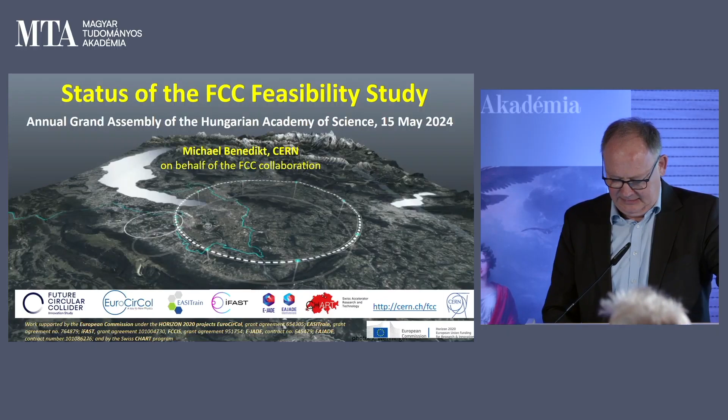In the first part, I would like to show you the scope of this future project, a little bit of the background when this study was launched, why it was launched, and the results at the intermediate review that we achieved. Then I would like to give you a feeling of where we stand with the preparation of the implementation of the project in the region, to show you that we are far beyond the point where this is just a paper study - it's now really becoming manifested in the region. In the third part, I would like to talk about technological developments on the accelerator side, on the technical infrastructure side, and the integration of all this with the local infrastructure. And in the end I will say a few words about collaboration and how the study is organized.

We call the program an integrated program because it consists of two different colliders that form part of it. The concept behind it is to prepare and build a science infrastructure for the 21st century that will remain at the absolute top level, providing the best conditions for accelerator-driven high-energy physics until about the year 2100. There are two machines: stage one would be a lepton collider, which we call FCC-EE, and this machine would operate at and produce the heaviest particles of the standard model - it will produce Z, W, Higgs, and top quark pairs.

So in that sense, it's not just a Higgs factory, as was recommended by the last strategies, but also an electroweak factory with the Z and the W, and a top factory. The design goal for this machine was clearly to produce the highest possible luminosities at all these working points, to provide maximum statistics under the cleanest possible conditions.

Stage two in the longer term would then be a hadron collider, functionally and conceptually similar to the Large Hadron Collider operating at CERN now, but nearly an order of magnitude higher in center of mass collision energy, and also an order of magnitude higher in luminosities. This would be a continuation of physics at the energy frontier, not just proton-proton, but like the LHC, also ion-ion or proton-ion collisions. The physics program, which I'm not covering here, is synergetic and complementary on the two machines.

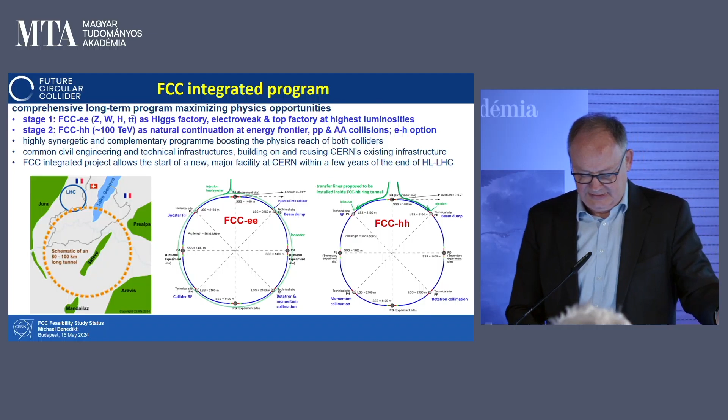At this moment, we are in what we call a feasibility study, launched in 2021, that will run until March 2025. This study should give sufficient input for an update of the European strategy for particle physics, which will be launched in summer 2025 and run until summer 2026.

In case of a positive recommendation from this European strategy update process, the CERN Council, with other financing partners, could then approve the project typically one year later, around 2027, beginning of 2028. This in turn would allow civil construction to start at the beginning of the 2030s, around 2032.

Civil construction would take about 8 years to be fully completed, followed by technical infrastructure installation, accelerator installation, and of course detector installation, so that operation could start in the middle of the 2040s, by 2045. Also indicated here is 2041 as the presently foreseen stop of high luminosity LHC.

Once the Lepton Collider goes into operation, completion of the physics program as presently envisaged takes about 15 years, so that by 2060 the Lepton Collider physics program would be accomplished. Then a typically 10-year turnover period from the Lepton Collider to the Hadron Collider, as was the case from LEP to LHC, would enable the start of the stage 2 Hadron Collider from 2070 onwards.

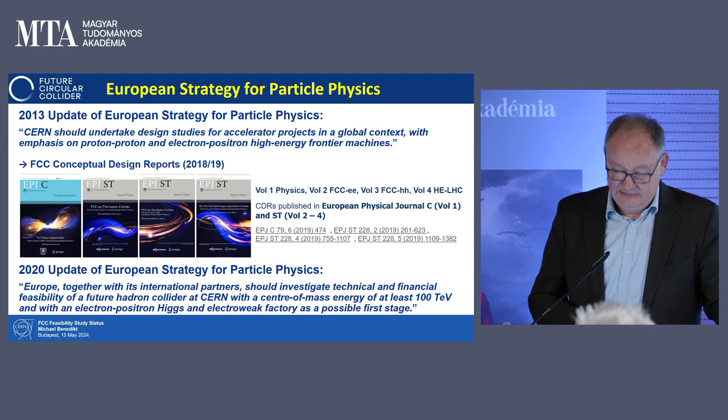Consequently, CERN launched a design study to prove the feasibility of the future circular colliders. This study was started in 2021, and here are the main goals, which can be grouped into three topics.

First, we should demonstrate that the infrastructure can be built, so feasibility of the tunnel, technically and administratively. This means considering where you put this infrastructure, where you want your access points from the surface to the tunnel. This needs interaction with the local region, with France and Switzerland, which are both host states of CERN, and also at the smaller level with the individual villages and communities concerned by the project.

The second big group is our core competency: this is the design of the accelerators, the design of the experiments, detectors, and the R&D on all these technologies.

The third block in this feasibility study is to develop the financing concept, the financing model, and the organization and governance models for the project during the construction phase, but also for the operation phase. This feasibility study should be sufficiently detailed to allow discussion by the European strategy and afterwards by the CERN Council on the realization of the project, and to enable a decision on the project. We will deliver this report by March 25.

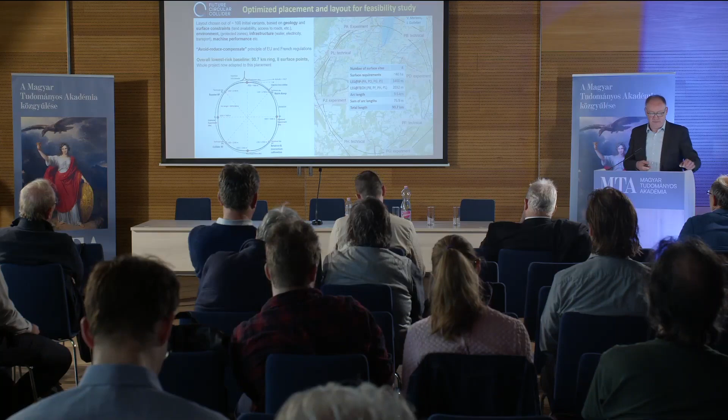This means everything visible on the surface needs to be acceptable, compatible with environmental aspects, with urbanistic aspects. It needs to be integrated with the existing highway, transport and road networks, with the existing railway networks because you need transport, with the existing electricity grid because you have to connect your 100-kilometer infrastructure at a few points, with the existing water distribution systems because you need cooling water for your facility, and so on. So this is one big block that you need to manage.

The other big block is the construction of the tunnel. There you have to look at the underground situation, the geological composition, and the risk depending on whether you put yourself in one region or another.

And the third big block is the scientific performance. If you build your machine too small, you will not have the energy reach of the Hadron Collider. If you build it too small with too small a radius of curvature, you will have too much synchrotron radiation, and you will not be able to produce high luminosity with the Lepton Collider. So these things you have to balance.

We studied about 100 different variants, differing in circumference, aspect ratio, number of surface sites, and so on. Finally, this converged to a 91, or 90.7 kilometer ring with four-fold symmetry, so each quarter is identical to the next of the 4 quarters. The arc segments are all identical, so there are 8 identical arc segments.

The arc segments are combined either by a long straight section, 2.1 kilometers, which houses technical elements for the accelerator, or following arc segments are combined by a 1.4 kilometer straight section that houses the experimental insertions. Experiments will be located at 0 degrees, 90 degrees, 180 degrees, and 270 degrees. In between you have the technical straight sections.

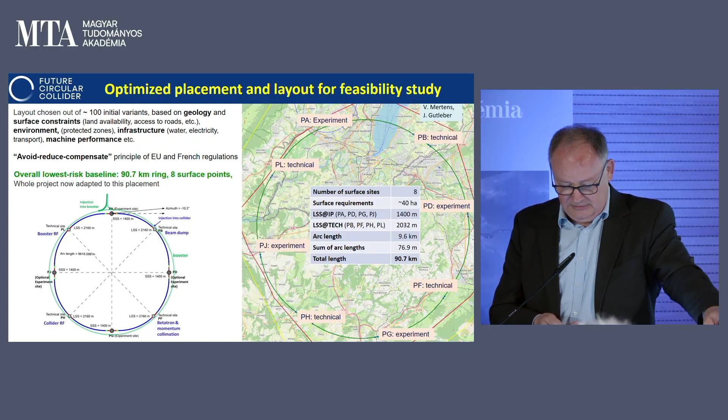Up to this point, we were working mainly on data that were already available from the host states: geological models from universities with geology departments in the region, from the geological institutes of France and Switzerland, and surface data from the host states, from the administrative organizations of the regions, of the canton of Geneva and so on. Based on this, you optimize your location.

Afterwards, you fix it. And then, of course, you have to go to the villages that are concerned, and you have to speak with the local population. You start this, of course, with interaction with the mayors of the villages concerned.

In total, there are 41 villages under whose territory the FCC tunnel would pass, and 10 or 11 are particularly concerned because there you will find surface sites. Since about a year, we have launched this contact, and we are discussing with these people, and we have now reached consensus with all these surface site locations, except for one where the optimization process is still ongoing.

But for the other 7, these are those marked in light green on this plot. With all the others, we have identified the individual cadastral surface plots that we want to reserve for the surface sites. This reservation process is now being put in place by France and by Switzerland to guarantee the availability of these land plots for the project during the design phase and the decision period up until the start of the project. This is key and essential, because it's absolutely not easy to find locations where you can implement such a large infrastructure.

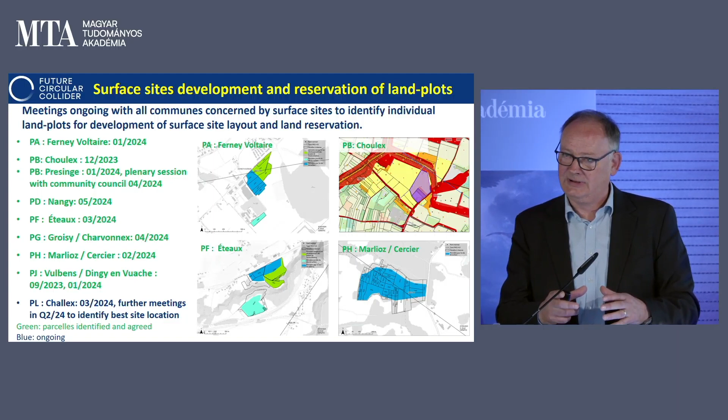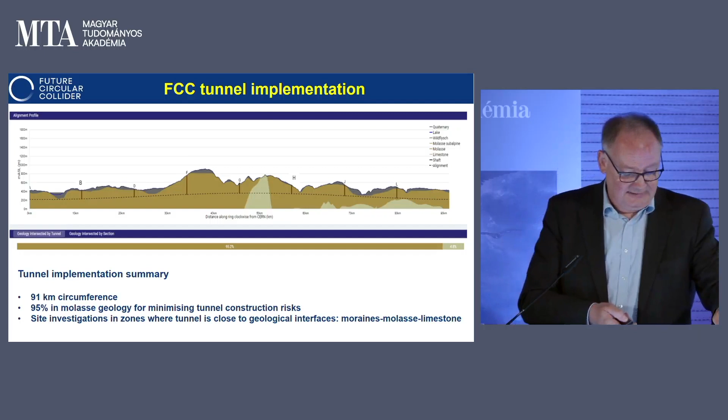Now I move to the underground site. Here on this plot you see a cut of the tunnel with the 3D geological model, and there are a few interesting aspects here. We want to stay in this medium brown area that you see nearly all over the place.

This is molasse rock. Molasse rock is a soft rock, a sandstone type rock that has no karstic structures, so there are no unexpected holes or whatever that are delicate if you do the tunneling with a tunnel boring machine. And there is normally also no water inlays with high pressure on the water. This means this is an ideal medium for tunneling fast, with low risk, with tunnel boring machines.

Now, when you look in more detail, you see that the tunnel trace comes very close to other structures. Here is the crossing of Lake Geneva. You see in blue the lake bed. Underneath the lake, there's moraine structure, and the moraine structure goes close to where the tunnel will be. Here again, there's moraine structures close to the tunnel. This is a location where the Arve River is crossing, and here on this side is the crossing of the Rhone River.

And here on the lower side, you see the light gray area. This is the limestone structures of the Jura Mountain. Limestone structure of Jura Mountain caused problems during the LEP tunnel construction because of karst and because of water under high pressure. So we would like to avoid this.

Now, to understand exactly these interfaces between the geologically favored zone and the less favored zone, we are now doing high-risk area site investigations, as we call this process. We will do about 28 to 30 drillings from the surface down to the tunnel level, exactly at the critical locations. You see here, for example, this is Lake Geneva, this is the Jura Mountain on this side, and here you have the Arve crossing with a couple of drillings, and so on and so forth.

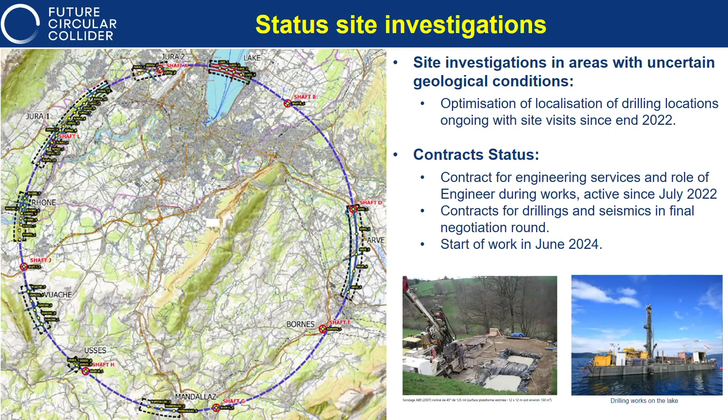We have been preparing this work for more than a year, and it will now start. All the contracts have been signed, and it will begin in June 2024. This is a project that will be visible across the whole region, so it needs exchange with the local population and acceptance already at this stage.

Moving to the underground design, we have now developed 3D models of all the underground structures at a level of detail that allows us to decide the construction technique and quantify material needs. So we can do a bill of quantities for everything needed to construct a tunnel, which allows a relatively precise cost estimate, calibrated by experience from tunnels recently constructed in France and Switzerland, such as the Alpine traversal tunnels, Gotthard, Brenner, and so on.

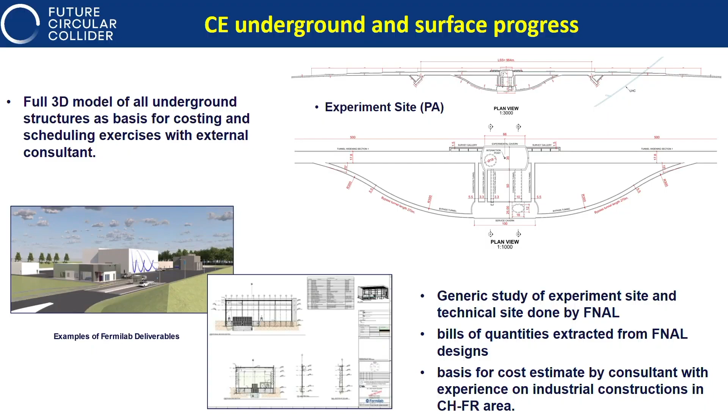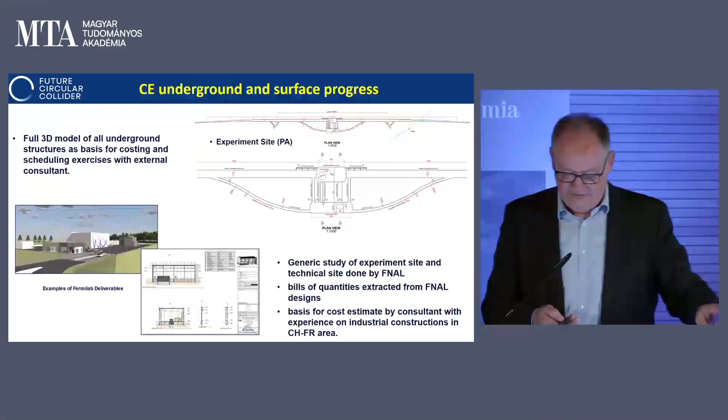Similarly for the surface buildings, we have one generic design for an experimental site, covering all the buildings foreseen there, and one generic design for a technical surface site, covering all technical buildings. Again, we have bills of quantities that we gave to a local construction company specialized in industrial buildings in the region, and they made a cost estimate based on their most recent projects. So we have good confidence in these cost estimates.

Speaking now about environmental aspects: when we excavate the tunnel, the excavated volume is 6 million cubic meters. When the material comes out, it expands, since it's no longer compact rock, corresponding to some 8.3 million cubic meters of excavation material.

This material doesn't come out in one place. It comes out where you position the tunnel boring machine, since the machine drills and the material emerges where it starts. So you have to deal with about 1 million cubic meters at each launch point of a tunnel boring machine. A big topic here is reusing this material.

The problem is that molasse is not a stable rock, so you can't use it like granite pieces, because it dissociates in some sense—it's not stable. But you can use it like a soil. The only issue is that it's sterile when it comes out of the ground.

So now we have a project—this is, in fact, the first FCC-related experiment. It's taking place on LHC Point 5, on a field in front of the CMS site. You can see the layout here, with about 18 test fields set up. We are using molasse material that came out of the High Luminosity LHC civil engineering construction over the last two years, and with several university and industrial partners, we are working on processes to transform sterile molasse into fertile soil that can later be used for land filling and covering with a fertile layer of soil.

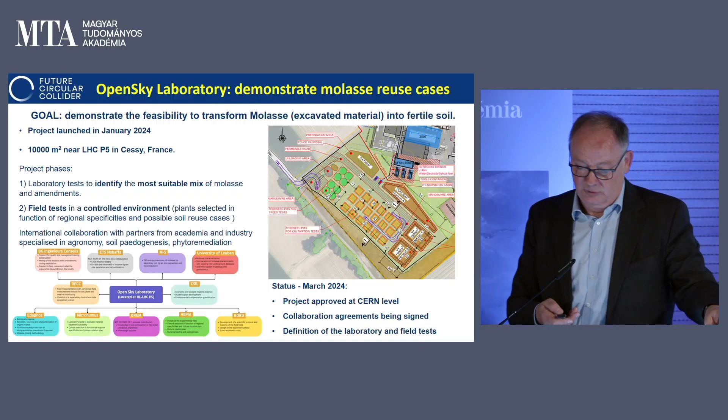A side effect of this is that, if the project is successful and demonstrates how to reuse molasse, it will need approval by the host states. If we get this approval, the technology can be applied to any tunnel project in Europe or elsewhere where molasse is the main material, and such tunnel projects are frequent. So there's a socioeconomic component of large-scale integration here as well.

Moving from the tunnel to the technical infrastructure, let's look at transport and electricity. For a project this huge, transport is a major issue, not just for operation but especially for construction. We've taken this into account and positioned the project so that at three main points with major excavation—points D, G, and J—we have a very close highway connection, within a kilometer of an existing highway access station. So you just need to bridge the distance from your surface site to the existing highway access zone, which is very efficient and helps with the acceptability of the project.

In total, to access all 8 surface sites adequately for any kind of transport and work, we will only need to build about 4 kilometers of road at the departmental road level.

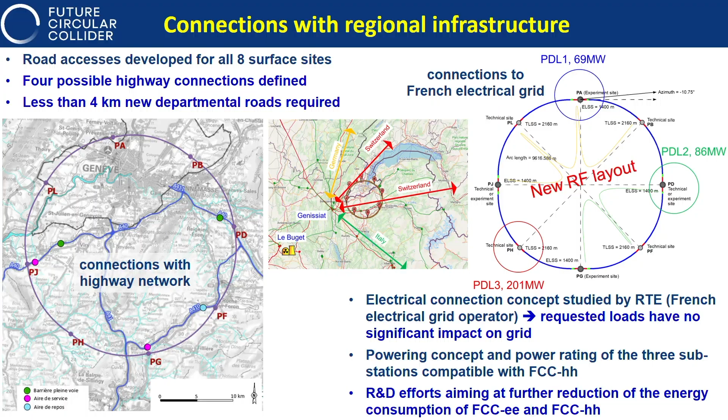And of course, this supply concept is already covering any needs for the stage 2 accelerator, the Hadron Collider. Now I move towards the machine side and the integration of the new infrastructure with the CERN infrastructure. If you look here on the right side, this is the overall picture: you see the LHC, this circle here, and the FCC, the lower circle below, and the SPS, with the red square zoomed in on that side.

So on the top here, you have the LINAC. This is the particle production complex, for electrons and positrons. It will be located on the surface on the CERN Prevessin site, roughly behind the SPS North Area, to the east side of the SPS North Area. From that point, the beam is accelerated to some 20 GeV by a high energy LINAC, and then it moves downwards to the SPS.

It touches the SPS tunnel close to point 4. This is done on purpose, to have the possibility to bring this beam into the SPS should there be any reason to do an experiment involving acceleration via the SPS tunnel. From that point, the beam moves further down to the level of the FCC and is then injected clockwise, via a U-turn, and the antiparticles anti-clockwise, into the FCC direction.

Now, this choice of being close to the SPS and having a transfer line with the same bending radius as the SPS machine also allows us, in principle, for stage 2, the Hadron Collider, to possibly use a superconducting machine in the SPS tunnel at much higher energy than the SPS today as injector for the future Hadron Collider, and to reuse the already built transfer line.

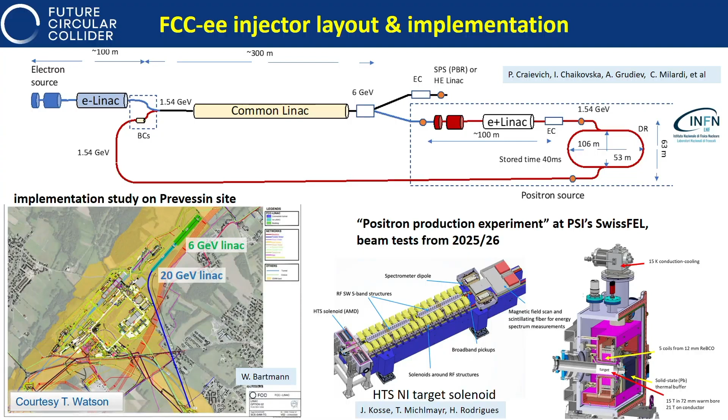Positron target and production is a topic that isn't addressed so frequently these days. We have a larger setup with partners located at the Paul Scherrer Institute in Switzerland, where we do a positron production experiment.

The SwissFEL free electron laser LINAC operating at the Paul Scherrer Institute provides 6 GeV electrons. With this LINAC we have a beamline, and we will put this positron target, shown here on the lower part, that is being produced at PSI. The capture structure is located in one of the experimental zones of SwissFEL.

We will have the opportunity to test and verify production efficiency at different energies, since we can vary the energy from the LINAC, so that by 25-26 we know definitively that the concept works and fulfills all specifications. The target design was done in a way that is directly scalable to the full power target for the FCC-EE.

Just to mention one thing decisive for the dimensioning of the machine and the key technologies: we allow the beams in the lepton collider to lose 50 megawatts in the form of synchrotron radiation at each of the 4 different energies. Since synchrotron radiation depends on the fourth power of the kinetic energy, we can have much more beam circulating in the machine at low energy, at the Z pole, than at high energy, and this transforms into much higher luminosities at the Z than at the ttbar.

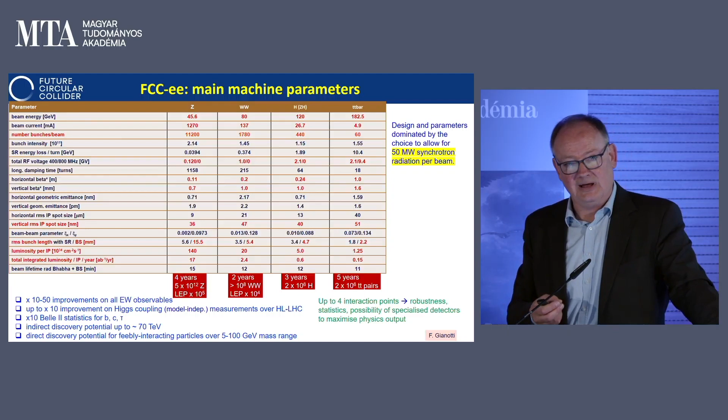It also transforms into completely different requirements for the radio frequency system at these working points, because the RF system has to put this 50 megawatts back onto the beam. This means the efficiency of the radio frequency system is a key technology and a key important object in this machine.

The important message here is that this is a machine that will not be static like the LHC. We put the LHC in place and it operates for years in roughly the same configuration - now we make a luminosity upgrade, but then it runs again in the same configuration. This machine will have quasi-permanent change, because whenever you go from one working point to the next, you modify the RF system substantially. You can bring in the latest technology, new power sources for the RF. So there is a long-term parallel RF R&D program in all aspects, alongside the lifetime and evolution of the machine.

And of course similar aspects will need to be taken into account on the detector side, since there is different physics that will be seen in the different phases.

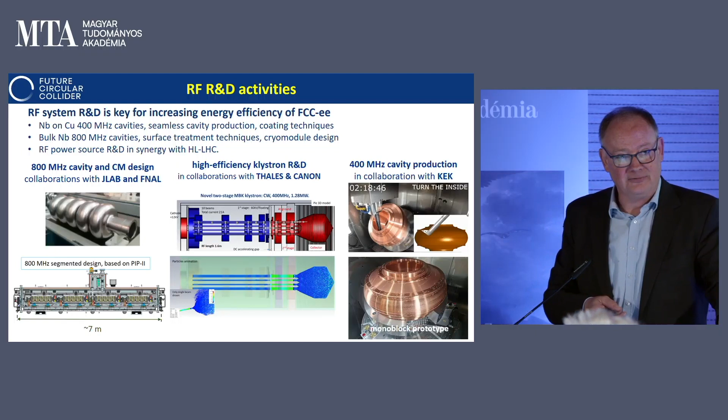Now a few slides on R&D activities, to give you an impression of what is being done and what we are looking at. Clearly radio frequency is an absolute key issue - 100 megawatts of synchrotron radiation needs to be compensated, and taking into account the efficiency of the RF system, this translates into 200 megawatts of electrical power. So whatever can be done to improve the efficiency of RF production or the cavity systems is extremely useful, and there are lots of efforts going into this domain.

I will not go into further detail here, but there are 2 different cavity types: one is copper cavities coated with niobium, or possibly other superconducting materials like A15 or niobium-3-tin, though this is still in the R&D phase. On the higher frequency side, 800 megahertz, there are bulk niobium cavities, with a lot of R&D on RF production. In the middle, you see new designs of klystrons to improve klystron efficiency by 20-30% compared to what is presently achieved.

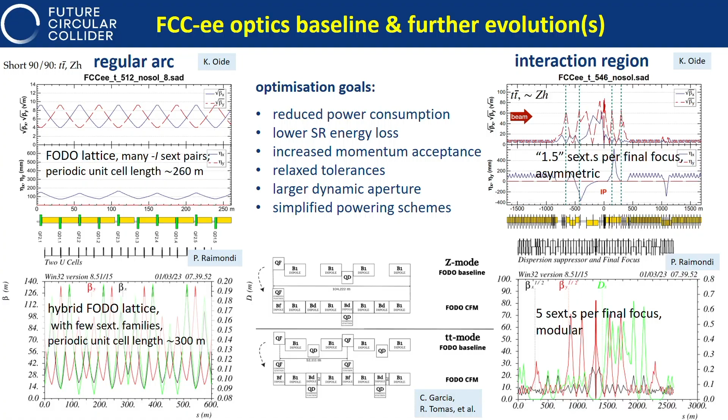There's also a lot of activity on the machine design, on the magnetic design and on the lattice design - how you configure your magnetic elements around the circumference to achieve the best possible final focus and maximize luminosities in certain conditions. Important here is to design something good for operation, tolerant against field errors and positioning errors. The alignment of a 90-kilometer accelerator is a non-trivial topic, and the more tolerant your lattice design is against these aspects, the more stable and efficient the operation phase will be. This is key and is permanently being improved.

Looking more into the engineering side, 80 kilometers of this machine consists of arc, and the arc is a repetitive structure. You design your arc cell - the smallest unit is a half cell from the accelerator physics point of view, and this half cell is repeated for 80 kilometers. The half cell has a length of 25 meters, so it's worthwhile to build at the earliest possible stage a model of this half cell. Whatever you develop, you put into this one-to-one scale model to understand transport, positioning, maintenance, accessibility, and integration aspects, keeping in mind you want to industrialize production as much as possible.

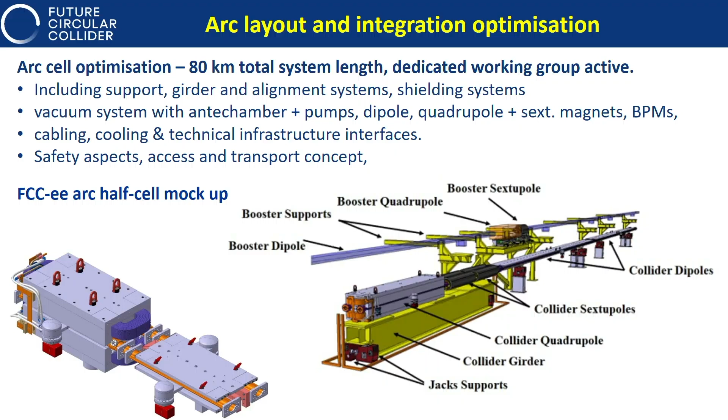So we are preparing in one CERN hall on the Meyrin side to build a tunnel segment of 25-meter length to have the full geometrical conditions, and then we will install in there a mock-up of 25 meters of the arc - a one-to-one model with all the cables, all the water piping, all these elements - to optimize this structure in terms of cost, operability, and maintainability.

Another topic coming back to sustainability is the question of powering the magnets, magnet design. We have a lepton collider in the tunnel with two vacuum systems. If you remember, the LEP machine had a single vacuum chamber, and the electrons and positrons were circulating in the same vacuum chamber. Having both particles in the same vacuum chamber meant you had to avoid that they see each other all the time, which meant avoiding filling the ring completely with bunches. This means lower efficiency in terms of luminosity, since you're not doing the maximum. That's why we have two separated vacuum chambers.

Two separated vacuum chambers means we can fill the machine completely, but of course you have to have two magnetic channels, one for each vacuum system. Here you see designs of magnets that can supply magnetic field for both vacuum systems while having only the powering needs of a single magnet. This means you gain a factor of 2 compared to a classical solution with two independent magnets, and this is done by these dual aperture systems. The magnet design is even strongly simplified.

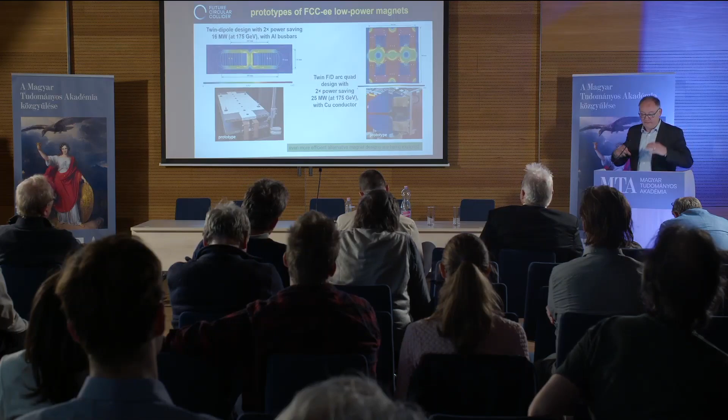If you look at the right side, these are two quadrupole magnets - one quadrupole aperture here, the other one here. You see the hyperbolic shapes of the quadrupole apertures. There's one coil that closes on the top and a second coil that closes from left to right on the bottom. A normal quadrupole magnet would have 4 coil pairs around each of the 4 poles. So this is technically much easier to produce, and it is energy efficient by a factor of 2 compared to 2 independent quadrupoles.

Another interesting topic is replacing these quadrupoles in the arc, which are the main consumers. The quadrupoles and sextupoles along these 80 kilometers of arc are the main electricity consumers, not the dipoles that bend the particles. This accounts for about 50 megawatts at the ttbar operation point. So there is R&D to replace quadrupoles and sextupoles with low-field superconducting magnets, using high-temperature superconductors in a low-field application, typically field at the coil of 1 to 2 Tesla, not higher.

This means you can operate these high-temperature superconductors at temperatures up to 40 Kelvin, which is thermodynamically interesting because you don't need as much energy to cool down to 4.2 or 1.9 Kelvin as we need in the LHC systems. This R&D is ongoing, and we will have first results in 1 to 2 years to see if this is a way to be pursued further.

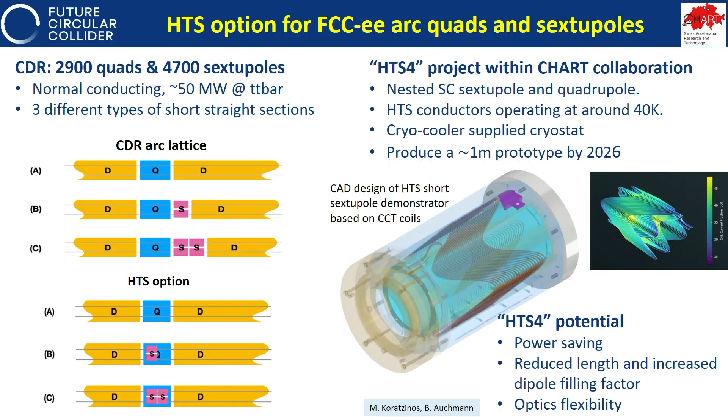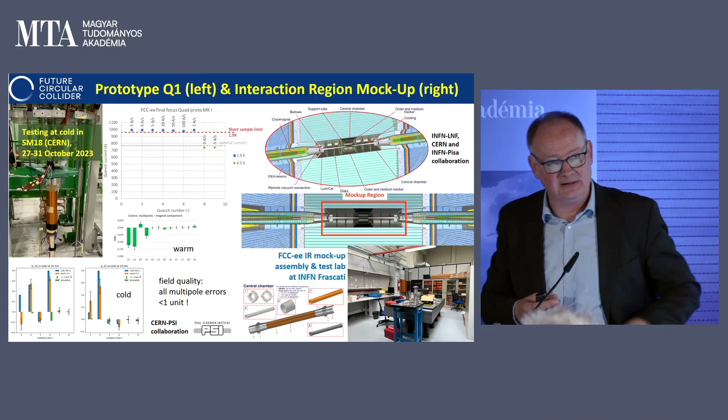With a partner in Italy, INFN at the Frascati laboratory, we are now setting up a mock-up of the machine detector interface, which is obviously also a very critical region, because you have this most inner detector chamber, and then the coupling to the cryostats that contain the final focus element, the compensation solenoids, and all this magnetic setup.

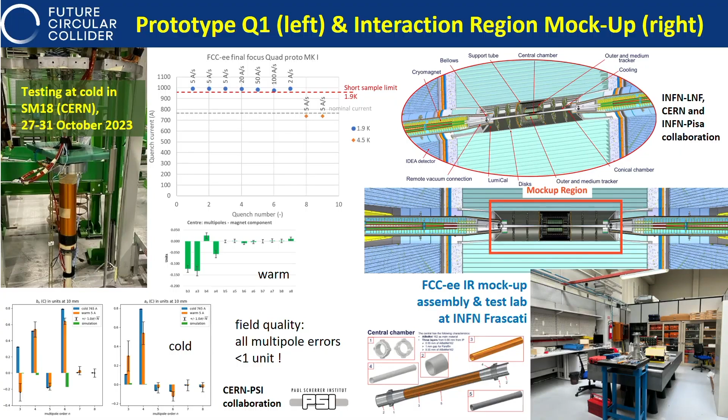In the lepton collider, all this is integrated inside the detector, because the L-star, the distance from the collision point to the first magnetic element, the quadrupole, is about 2 meters here. Contrary to the LHC, where the magnetic final focus is far away from the detector, here we are in the middle of the detector, which comes with its own challenges and problems.

Now I move to the hadron machine. Here again, the parameters. The goal in terms of collision energy is on the level of 100 TeV center of mass. We quote a range here for one main reason: the key technology for the hadron collider is the high-field superconducting magnets. The goal is to reach an improvement with respect to LHC by a factor 2, so to go from 8 Tesla to 16 Tesla.

Plus or minus some margin. There are two technologies available to go this direction: either niobium-3-tin, like it is used for the high luminosity LHC upgrade, but that one is definitively limited to 16 Tesla. The second technology is high-temperature superconductors, which are far less developed for accelerators than niobium-3-tin, but may have completely different potential, because they are not limited to 16 Tesla. They could probably go to higher field, and one could operate these magnets at somewhat higher temperature, in the 10 to 20 Kelvin range. So there are different aspects to take into account.

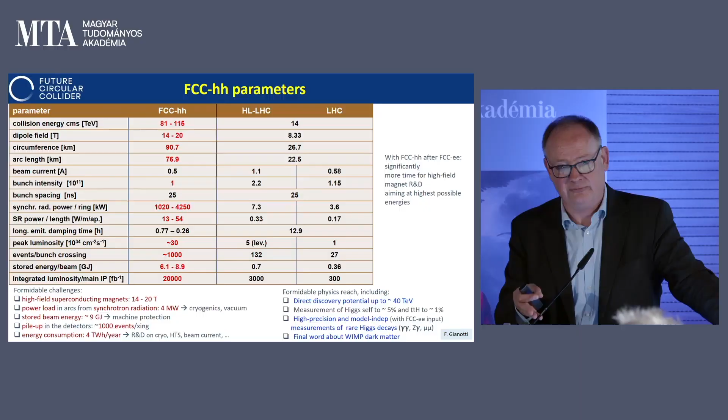The main point here is we have about a 25 to 30 year R&D program in front of us to develop the magnet solution that would then be industrialized for construction of this accelerator. This makes it impossible to do a serious prediction now of which technology to really go for. We have to go step by step and see, with the advancement of the R&D, which direction should finally be taken.

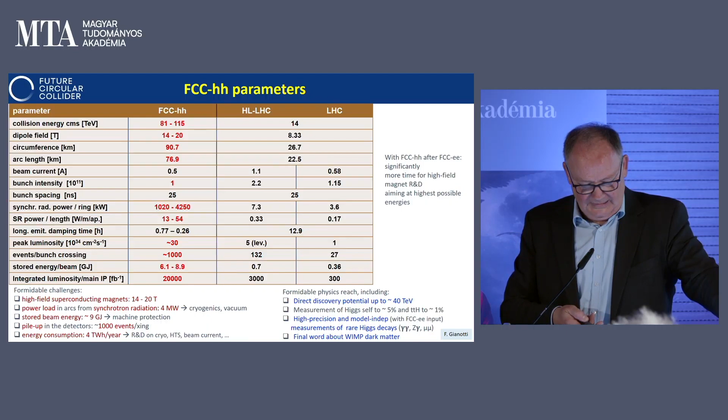So for the hadron collider at this moment, our key issues and main focus are on the optics design, because we have to have a solution that fits perfectly with the tunnel and with the lepton collider. The second big activity is magnet-related, all sorts of magnets. Of course, the high-field cryomagnet system is one of the main blocks. So here is a summary of what I just said.

A septum magnet is what you need to bring a beam either into the accelerator onto the orbit, or to take a beam out. How does this work? You may have a beam that is circulating, and you want to add more bunches into this segment. This means you come from outside, and you have to bend the beam from outside close to the orbit on which it should ultimately go. This, of course, you do with a magnetic element.

Now, if we go with this hadron collider to very high energies on the injection and extraction side, we need very high fields. And if we can't have high fields, we need very long distance, which we don't have. So we want high fields, we want superconducting septum magnets. It's called a septum magnet, this object that should take very little space, but provide very high field on one side so the injected or extracted beam goes in, and should have no field on the other side, to have zero perturbance of the circulating beam, all at minimum space.

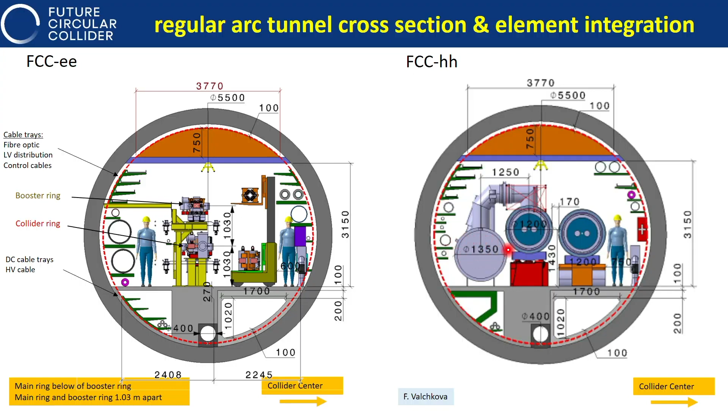And of course, this network also provides, from a very early stage onwards, the possibility to prepare for in-kind contributions, for individual contributions that can be optimally managed with low risk due to the involvement of partners in the design, conception, and construction of the contributions.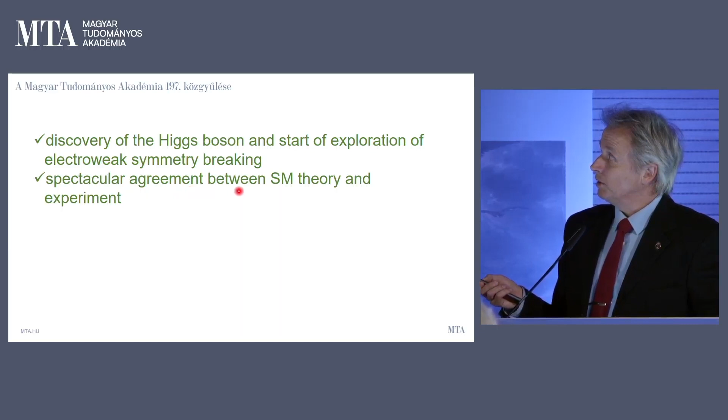Then, we also know that there is a spectacular agreement between the standard model theory, which is based on electroweak symmetry breaking, and experiment. In fact, we saw it this morning that almost all measurements agree perfectly.

The signals of new physics, which we are all very much interested in, around the TeV scale, are at best elusive. In short, we haven't seen any new physics signals. There are certain anomalies, but no proven new physics yet.

At least from colliders, because from other experiments we know that there must be new physics which we don't know of yet.

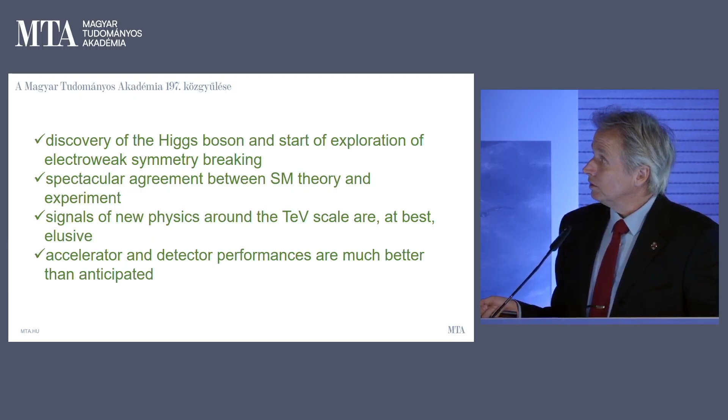And there is accelerator and detector performance of the past and present colliders, which are much better than they had been anticipated at the time of design. So all that you heard here is very ambitious, but you can be quite optimistic that by the time they will be built, the machines and detectors will perform much better than described here.

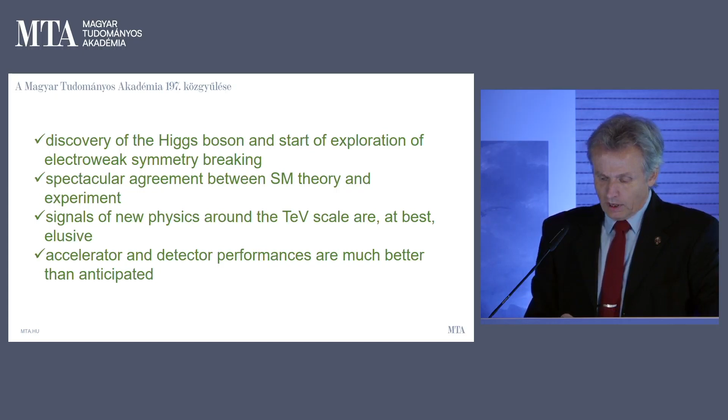And finally, as a theorist, I would like to convey the message from the theoretical viewpoint, that advancement in precision of theory gives good inspiration to perform ever-improving precision measurements. And the first point I would like to make is that these machines, FCCee and FCChh, will be primarily precision machines.

In order to prove or demonstrate this, I want to focus on the Higgs couplings. So here you see on the right the branching ratios of Higgs decays into different final state channels: BB bar, tau plus tau minus, gluon, CC bar, quarks, photon, etc., and the main channels, massive vector bosons and TT bar, as a function of the hypothetical Higgs mass.

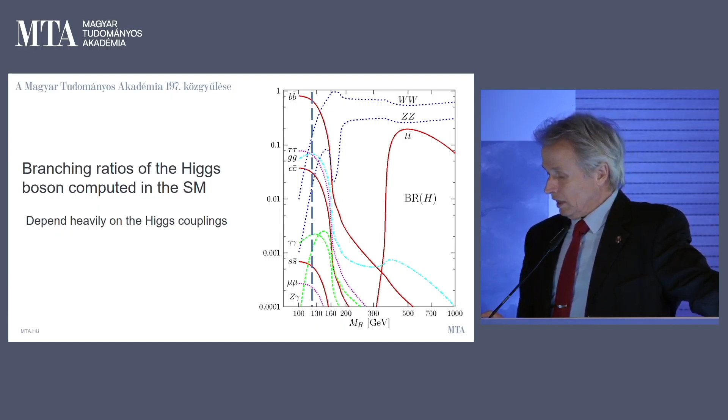Of course, by today we know that the Higgs is 125, and this line shows that point in the phase space. From this picture, we see that nature was very kind to us—kind because this Higgs mass means that we can observe many different decay channels with measurable probabilities, and from that we can extract the many different Higgs couplings to the various particles. This is an ongoing project at the LHC today.

Now I would like to demonstrate how this total Higgs width and couplings can be measured at the FCCee. Typically, we call the electron-positron colliders precision machines.

And here you see on the left the high luminosity LHC results. If there is a missing bar, then it is the standard model value, which has no uncertainty. These are the relative uncertainties that you can achieve, predicted relative uncertainties at different machines, like FCCee at 240 GeV.

And then you can add the FCCee at higher energy. And then you can add the high luminosity LHC, which, as we learned, is going to operate for a long period. There is also a bar for the eh collider, so the electron-proton collider. And you see that there will be a significant improvement in the relative precision of these various couplings.

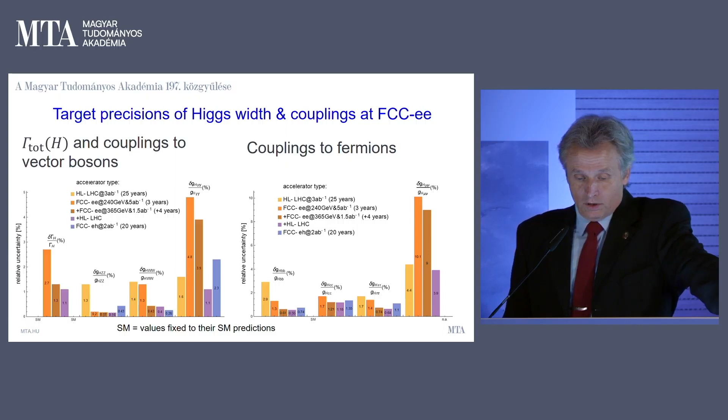Now, these couplings are important in order to prove that the Higgs boson that we discover is indeed the standard model Higgs boson.

Or if you find a deviation beyond these uncertainties, then you can be sure that there is new physics behind. Here I add on the FCC modes also in the proton-proton collision mode, so that is the final bar. And these are the target relative uncertainties - this is 1%. So you see that all these couplings will be measured with better than 1% uncertainty, which is amazing in high-energy particle physics. I remember when I was young, when we talked about uncertainties, we always mentioned roughly an order of magnitude - so 100% uncertainty.

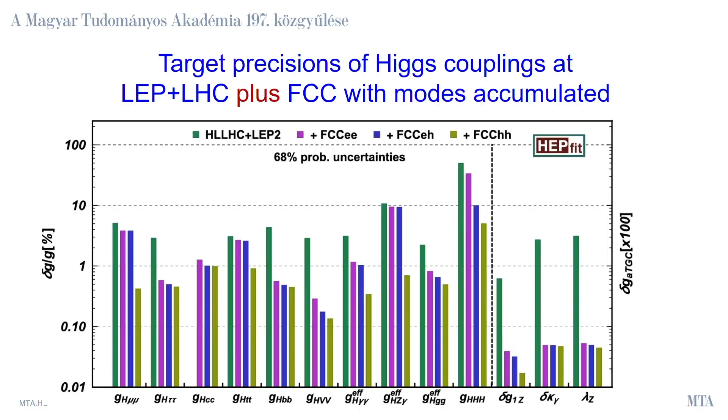There are, of course, many other parameters and observable quantities in the standard model which are not Lagrangian parameters, but equally important, like the masses and width of the Z boson, or the Weinberg angle, or the strong coupling, which can be measured at the FCC-EE. This is the present uncertainty, this is kiloelectron volt, so that's why we have these very large numbers.

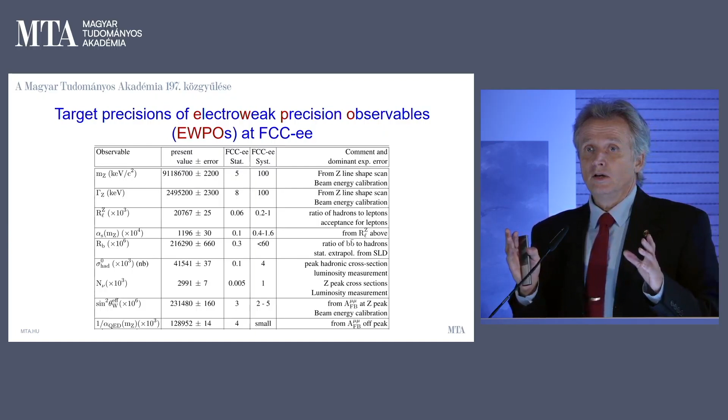And you see what is the forecast uncertainty at the FCC. So it's almost 2 orders of magnitude, 50 times better precision, which is quite astonishing. And of course, when you reach such an uncertainty, then you will already start seeing probably problems with the standard model.

These are similar quantities which can be measured: forward-backward asymmetry, or the W boson mass and width, the number of effective neutrinos below 50 GeV mass, and so on. The TTZ coupling will be measured with significantly better precision than we can measure it today. So the bottom line that you can take home, that at least an order of magnitude decrease in uncertainties with respect to the Large Electron-Positron Collider or the Large Hadron Collider.

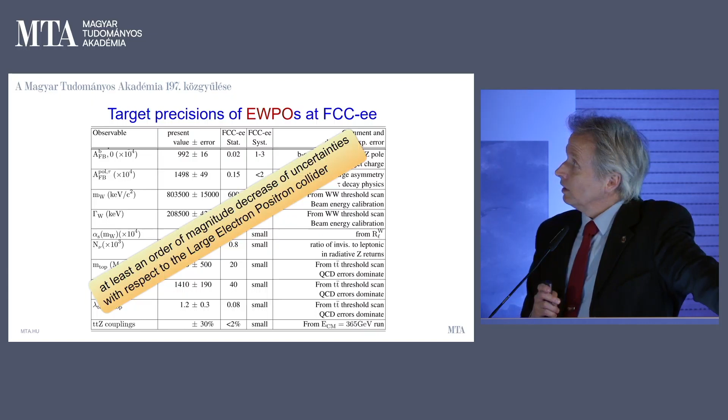With this precision, we can explore indirectly up to the 100 TeV energy scale. And with indirect results on the Higgs couplings, as I demonstrated, with correlated properties of W, Z, and Higgs bosons, and quarks and leptons, also significant improved precision on electroweak precision observables.

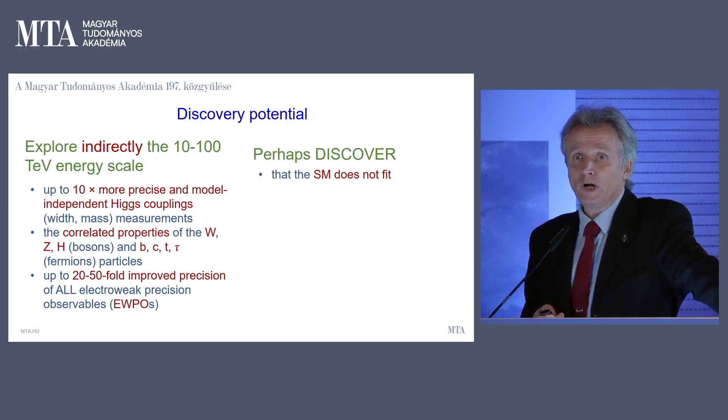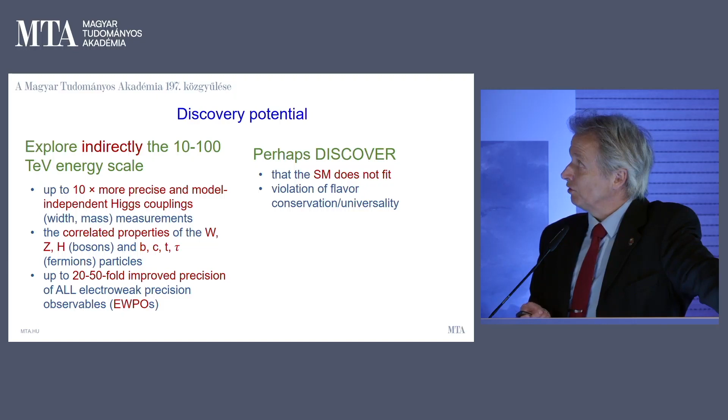We may perhaps discover that the standard model is not so good after all - it doesn't fit so well as we think today. Or we can further discover things which are hinted as anomalies at the LHC, like violation of flavor conservation and universality.

But beyond the precision, the FCC can constrain cosmology or serve many other new results. We know that matter and antimatter are not in equal amount in the universe, because we are built of matter and we are here. And the major theoretical explanation, or the folklore, requires sufficiently strong first-order electroweak symmetry breaking.

I mentioned at the beginning that electroweak symmetry is very peculiar - we know it exists, but we cannot see it, so it is broken. And it has to be sufficiently strong first order for baryon asymmetry. And we also need large CP violation, and these are absent in the standard model. So we have to go beyond the standard model, and they can probably be explained by beyond standard model physics.

Now, testing CP violation exhaustively is beyond the reach of FCC, but testing phase transitions for specific, especially for specific simple models, is possible. And an example I would like to give is the very popular, because very simple, extension: a singlet scalar added to the standard model particle spectrum, which can have a strong first-order electroweak phase transition in the parameter space where, if it happens, the scalar can be explored exhaustively.

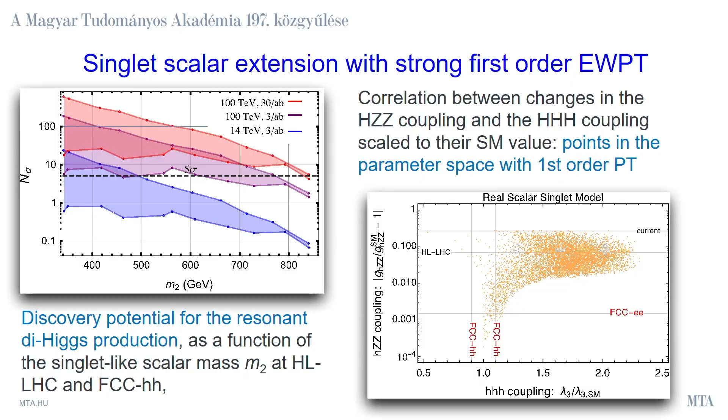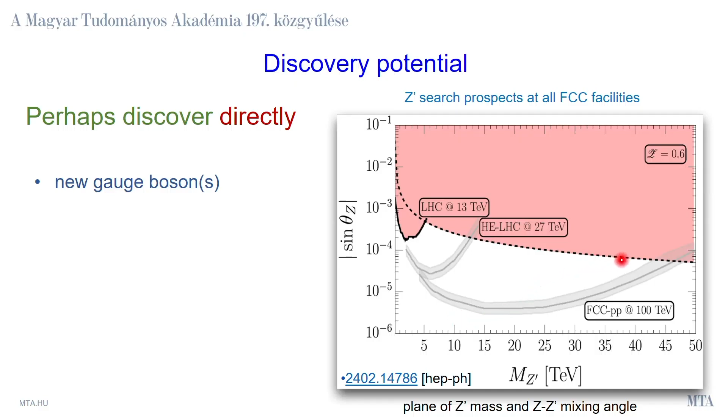FCC may discover new particles, many new particles. I will only mention one, perhaps a new gauge boson. This is a new Z prime, a new gauge boson, which is a massive gauge boson, so it will mix with the current Z massive gauge boson. And here you can see the current exclusion limits, and this is how this exclusion limit will be extended by the high energy LHC, and this is how it will be extended by the FCC-PP.

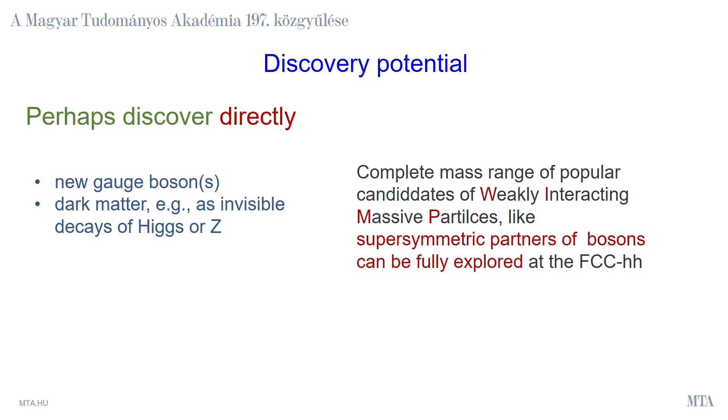I don't want to go to dark matter. There are many candidates for dark matter, and the weakly interacting massive particles are very popular candidates, and most of them can be exhaustively studied. Another thing which probably can be explored is the feebly coupled particles in the 5 to 100 GeV mass range, such as right-handed neutrino, which many of us believe must exist.

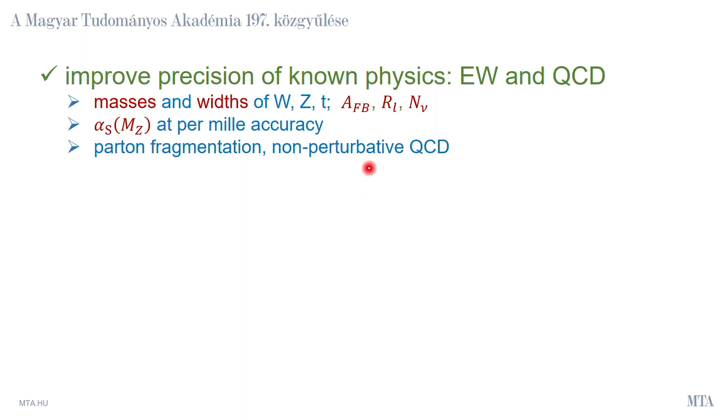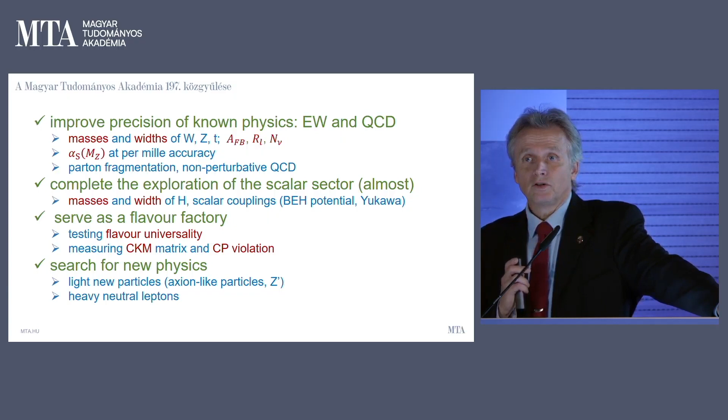So in summary, we may say that the precision of known physics will improve tremendously. We can explore the scalar sector almost completely. It will serve as a flavor factory, and we can test the CKM matrix, CP violation, and flavor universality, and we can search for new physics at these machines. So be prepared. Thank you.

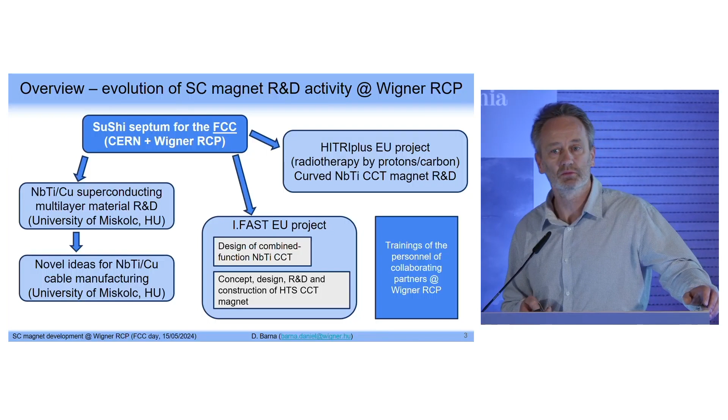Our team is small but smart, I would say, and consists of young people, so I think this gives us huge potential. I will talk in general about the superconducting magnet R&D activity at Wigner, and emphasize how this has been related to collaboration with the FCC project.

So this project was the SuShi septum. How does it do?

Anyway, it's not easy. The SuShi septum for the FCC was the origin, and all other activities derived from this. In particular, it split off into a niobium titanium superconducting multilayer material R&D project with the University of Miskolc, which will probably continue with novel ideas for niobium titanium cable manufacturing, but I'm not authorized to talk about that because that's on the ideas level and it's probably a kind of industrial secret.

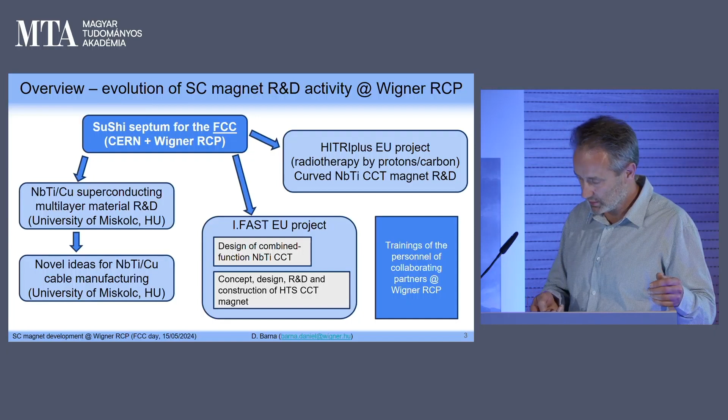So two European projects benefited, or actually spun off, from this original activity. One is the HITRIplus EU project, dealing with radiotherapy by hadrons, protons or carbon ions. And the I.FAST European project, where we participate in two activities. In this talk, I will concentrate on these two activities, because this is our focus right now.

Besides these activities, we have provided, and are providing, trainings to several of the collaborating partners already, so I think this is a rather fast rising curve.

So let me start with the SuShi septum project that Michael also talked about in detail, and this was the seed, or the genesis, to all of these activities. He introduced the FCC HH, the proton machine, which is circulating 8 gigajoules of beams, actually twice per beam.

And you need to extract this beam very fast, either programmed or in a safety abort, into a dump system that can absorb this extreme energy.

So you start with a kicker magnet that you switch on very quickly. It's very quick, but it only gives a small deviation to the beam, and it starts to diverge from the nominal orbit. After some distance, it has a large enough deviation so that we can inject it into this septum magnet.

This septum magnet provides zero field for the circulating beam and high field for the extracted beam. We need a thin wall to make the system compact, yet a high field, at least 3 Tesla, and it needs to be quasi-DC, following the beam energy, so it needs to be constantly powered. Yet we want to avoid high power consumption, so we were thinking about a superconducting solution, which seemed to be the only option.

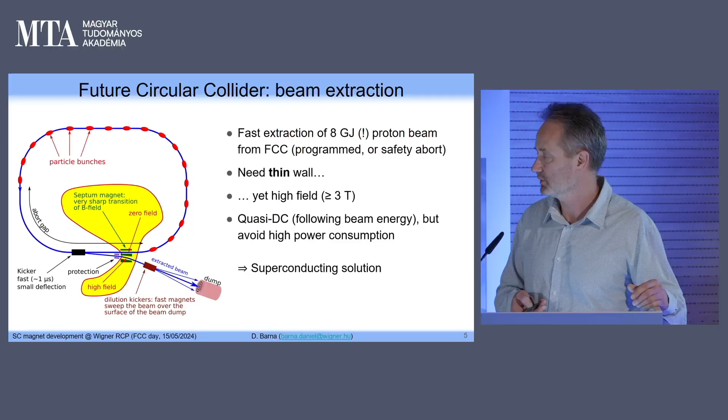Let me make a first excursion towards the canted cosine theta concept. In this magnet, we superimpose two canted solenoids, which have tilted magnetic fields. If you superimpose them, you have a transverse field as shown, which is what you want in an accelerator. It has a regular and simpler geometry, and it has a naturally open aperture for the beam.

In reality, this is constructed by machining grooves in a cylinder, and it's an easy and precise process these days due to modern CNC machines. And each turn is individually supported.

The limit to the performance of these magnets is magnetic forces. So each turn is supported by this mechanical structure, so it's quite robust.

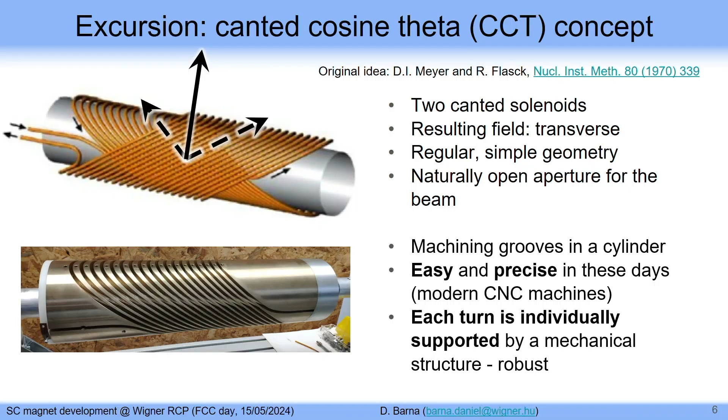So as Michael explained already, this magnet consists of a CCT-like winding, which produces the field. And inside this magnet, we have the blue stuff, which is a passive superconducting shield, which excites eddy currents and expels the field from its interior.

So this is the cross-section. You see that on the right-hand side, you have a homogeneous field excited by the magnet, the winding, which is around. And if you cool down the superconductor in zero field and then ramp up the magnet, then the eddy currents automatically expel the field from the inside.

The winding geometry was designed such that it gives a homogeneous field in the presence of the shield, which distorts it.

And after this idea, we started a collaboration with CERN to construct a demonstrator prototype. We made proof of concept tests at CERN with an MgB2, a niobium titanium copper multi-layer sheet, and high temperature superconducting tape, and they proved that the concept works.

And then the project was a kind of flagship project, which started a new activity at Wigner and also in whole Hungary. It started as a one-man show from scratch in a literally empty room, and we had to construct all the infrastructure for ourselves.

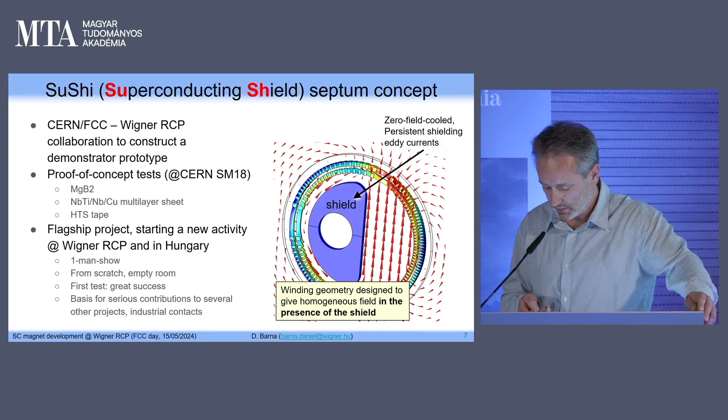And the first test of the magnet was last year, which was a great success. And this was the basis then for serious contributions to several other projects. This is how the magnet is constructed.

So you see the two, the red and blue, which are the two mandrels for the winding. Inside the pink stuff, or all the other related stuff, is the shield that you insert, and this is inserted in an iron yoke, which boosts the field.

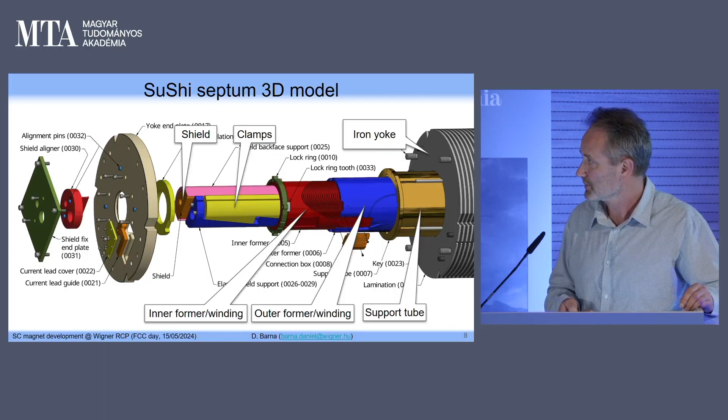This magnet possibly went into the high luminosity LHC. The entire design and construction process was then done at Wigner. And after all, we did some improvements in the design, and this was fed back to CERN. So I think it is a win-win situation that we are really keen on, that it's not a one-way collaboration.

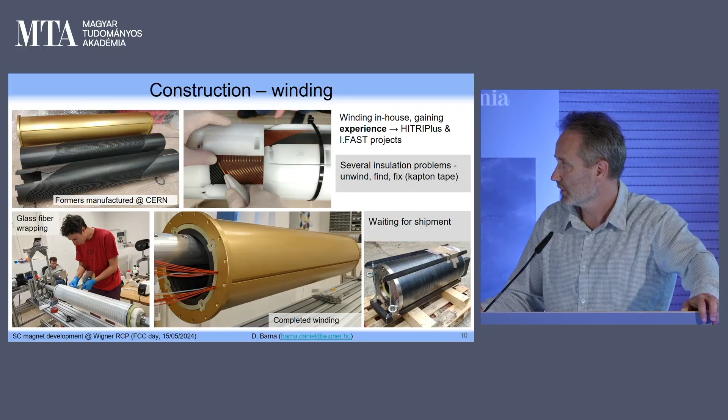So there are a few highlights from this project. On the top left, you see the mandrels, or also called the formers, that were manufactured at CERN. On the right top, that's the winding process, and the experience that we gained was then transferred into the two European projects, and this is how we entered, actually, because we were one of those who had the most experience. And then you add a glass fiber wrap, and this on the bottom center is the completed winding, and the bottom right is the completed magnet.

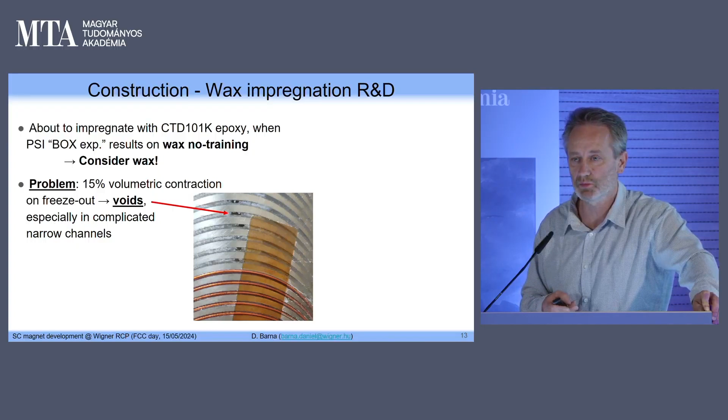These magnets are typically impregnated with a kind of epoxy resin, but when we were right at that phase, there was a brand new result from Paul Scherrer Institute showing that on short samples, wax, paraffin wax, produced no training. So we made a very quick detour and launched a few months campaign at Wigner to develop this impregnation method with wax to avoid these kind of little holes and voids.

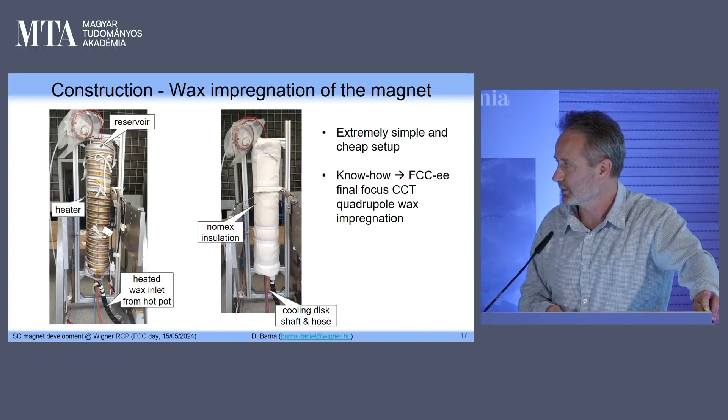The magnet was shipped to FREIA at Uppsala University and tested to nominal current without a single quench. And this is a very fast process because these magnets normally train, which means that you can only reach the nominal current in several steps after several quenches. That's a lengthy process, and this was achieved at the first trial.

Right, nominal. I have a list of different YouTube and other sources if you want to have a more detailed look. So one of the spin-offs is the material R&D at the Miskolc University. The key component of this magnet is the shield itself.

The best candidate was this niobium titanium copper multilayer, which was very expensive, and this was a discontinued product, and the experts were retired. So we initiated a collaboration with the university to keep the technology: CERN, Wigner, University of Miskolc, and the ex-engineer from Nippon.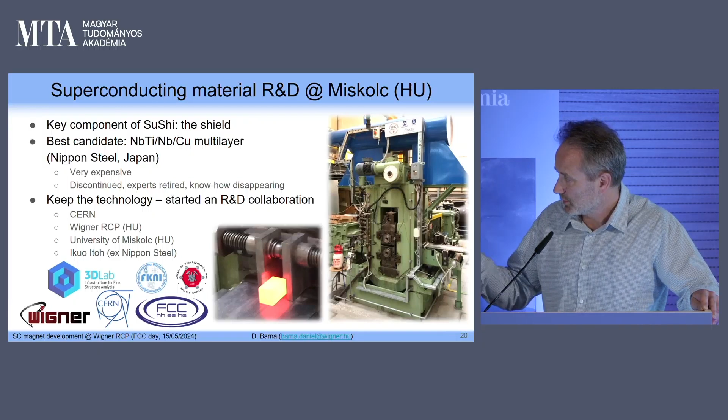Here you see the rolling mill of the university and one of the samples being hot rolled at 700 Celsius. The good news is that we could already reproduce the critical current density of the original sheet, and at the same time, we could do this by eliminating one component from the structure.

The niobium layer between the two components is an unnecessary addition only needed for the technology itself. The contract for the final size sheet manufacturing is in preparation, and here also FCC was the seed, providing a scientific and commercial demand, plus the know-how and support.

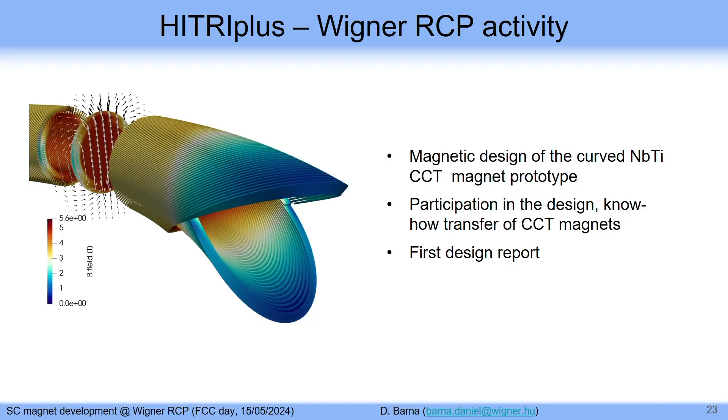In the HITRI+ project, the goal is heavy ion therapy research and integration, preparing cancer treatment by heavy ion beams. This involves the design of a curved CCT magnet. The last activity is the IFAST project, where we participate in the design of a straight CCT magnet.

Our main focus now is a high-temperature superconductor CCT magnet with 4 Tesla central field, 1 meter long. The HTS conductor is a sensitive tape with several problems; the tape routing is non-trivial, so you cannot bend it in any way.

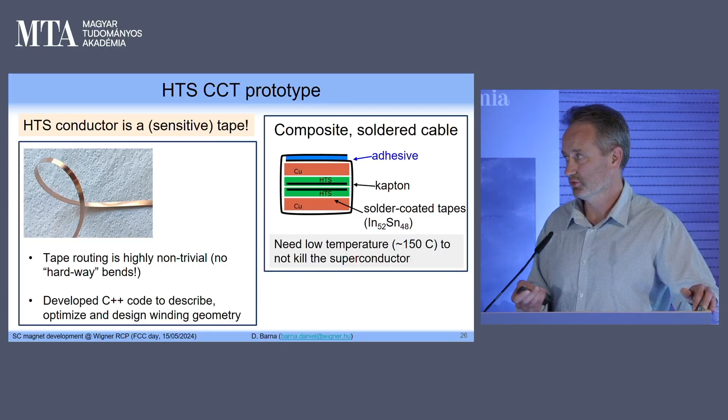It needs to be designed, so we developed our own code base for that, and we use a composite cable that needs to be produced in some way. This is the geometry we designed and optimized.

The CAD design is almost completed; it's quite a sophisticated structure. We transferred the winding geometry from the C++ code to the CAD model, and we already 3D printed a few components to test them. We have a test mandrel manufactured to practice winding.

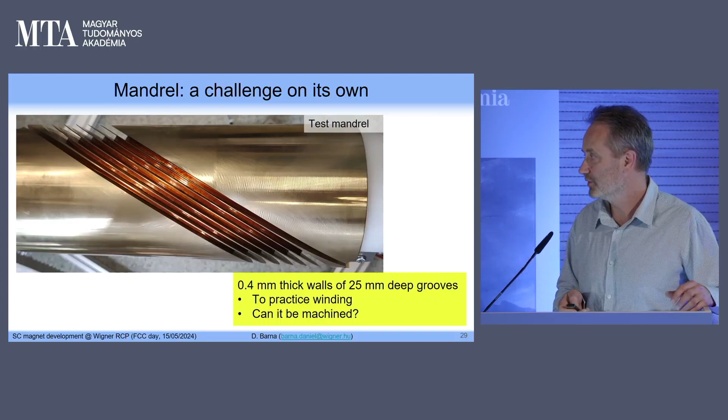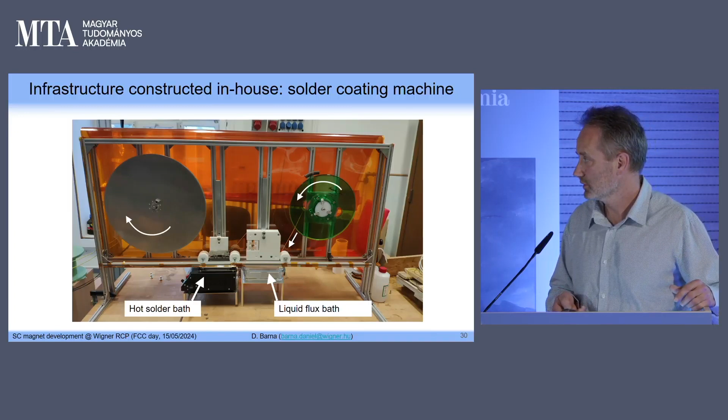We constructed in-house a winding machine that has two spools of HTS tapes, copper tapes for stabilization, and on the fly it adds Kapton insulation.

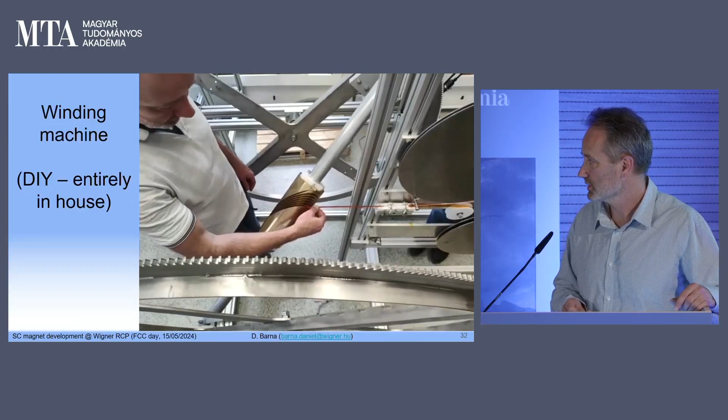The whole set of spools is on a moving frame that follows the movement of the mandrel, and it's controlled by a Raspberry Pi, so it's a quite cheap and easy system. Here's a little illustration of how the winding can be done.

So, let me finish finally. The FCC project created challenges for us and for many communities, and it was a new kind of project in that it encouraged new concepts and an open mindset. It was not only a quantitative but a qualitative change and challenge. It was explicitly said: please propose something new and not just tune up something existing. It also provided resources and an organized collaboration framework.

The SuShi Septum was a seed project that was very successful, and actually it was kind of an ideal collaboration model coming to life, I think. We started from scratch and focused on CCT magnet technology, where we can make significant contributions without the huge infrastructure that we're lacking. We are now, I think, quite a significant player in many different projects, and the three specific projects are listed below.

Finally, let me finish with the acknowledgements. There are a lot of people who contributed significantly, and I'm really grateful to them. Thank you very much.

And as you see, Daniel was speaking about a one-man show, but I think you need a few good young men and women. Well, now we do, yes. Okay, thank you very much.

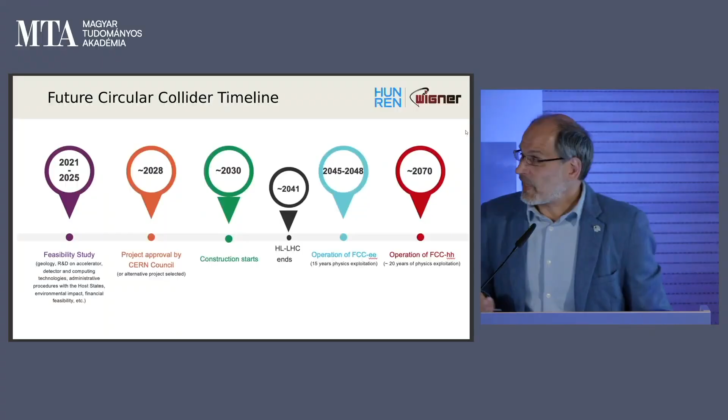That's the point where probably we can start with a circular collider. There's still work in progress or close to the end at this stage, and then we can turn to operation. I can choose a very beautiful date, 2041, as a reference for the rest of the talk.

But the question is, who will do this job? Because 2040 is far away. So let's say a little bit about the KSH statistics of the Hungarian population, and here you see the working population in the middle.

This happened during COVID, there's a little bit of a peak. I do not know who was at home and who was not. But anyway, as in most European countries, this is decreasing, though there was a tiny little peak.

Let's put where we are now and compare this with what we see in the CERN Greybook database, which contains all the people working for CERN in some sense. We are about 111, which means 0.0017% of the working population. I can use this number as a reference and make further trivial estimations for the future.

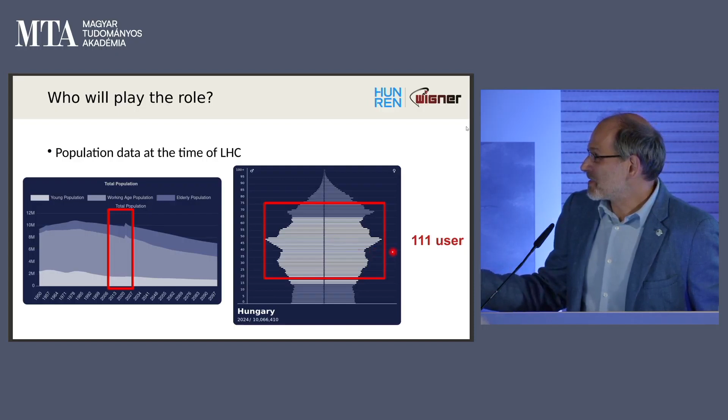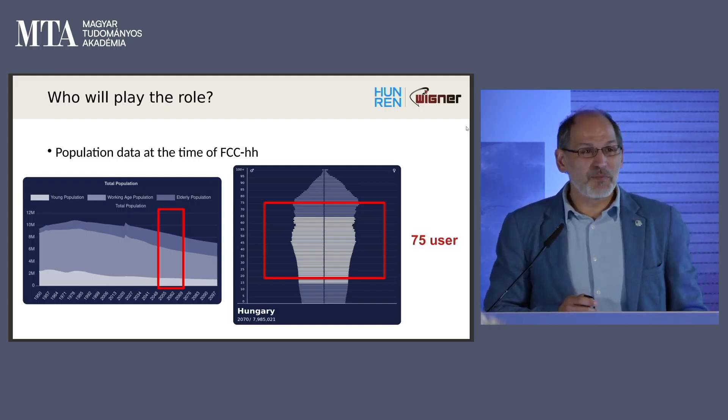I hope you enjoy. The question is what will happen later on. This is the time when we have 111 users. In 2042, we will have a little bit less users, and my age will reach almost 65, 70. If I go to 2070, the FCC-hh, you see we will have only 75 users. It's very flat. This is just estimation for the future, so don't take it seriously, but at least you can see that the possible number of people who can work at the FCC-hh is pretty much decreasing.

So we have to do something. You have to do something. You are here, young people, you have to do something. Another interesting issue is not only who will play the role, but who will pay for it, that's another issue.

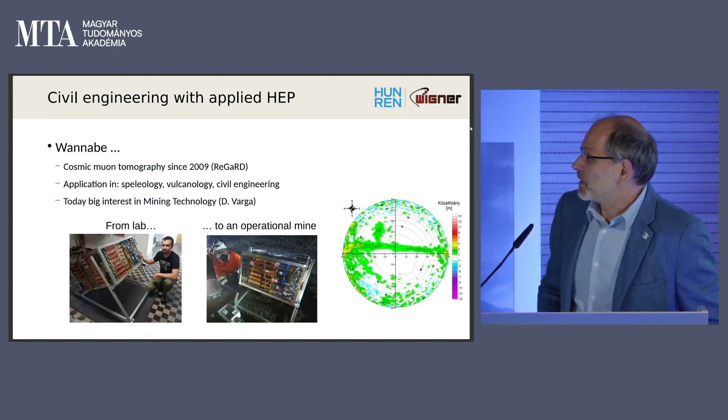The DRD1, which is dedicated to gaseous detectors, is where we are playing a key role. We have a long history with large-scale gaseous detector building, such as the TPC of ALICE.

We also joined DRD5, which is quantum sensing and technology, associated with the CERN Quantum Technology Initiative, where we participated in phase 1 and hope to continue. The leader of phase 2 will be our guest for the GPU day, so if you are coming, you can meet her.

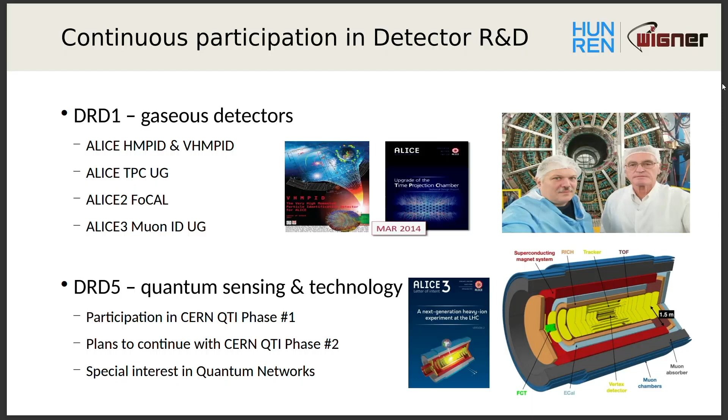They have special interest in quantum networks, especially the White Rabbit project, which could be good for FCC background. We have connections with trigger and firmware, and the DAQ group led by Tivadar Kiss is working on DAQ systems, not only for ALICE but for the EDICAM project, for fusion technologies, and also for CMS.

The recently developed LPGBT plus Versatile Link Plus is now being used in the ALICE upgrades, and it was a unique opportunity for us to continue these activities with further DAQ systems.

We're also trying to look forward to the future. This is NextGen Trigger, the new project from CERN, and recently Alberto Di Meglio, who is the leader of this group, visited us and presented it. We're trying to keep up the connection with him.

Hardware: the Wigner Data Center, T0 part, was used by CERN for years. Now we're turning to a new phase, so we joined the EuroHPC and JENAA collaborations. Hopefully we will have a supercomputer with 20 petaflops soon, and the Wigner Scientific Computing Laboratory supports and speeds up simulations and calculations with parallel computing.

Not only that, we have a dedicated site, the Wigner Analysis Facility, specially dedicated for parallel evaluation of CERN data, such as the Hyperloop system, which was first tested here at this site from the ALICE collaboration. Software-wise, I mentioned parallel computing.

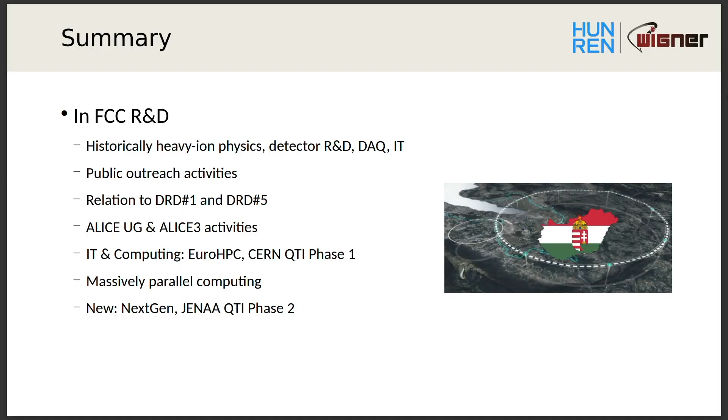So this is, I think, the point when I reach the summary. As you see, historically, based on heavy ion physics and earlier detector R&D, we are well positioned. We are doing a lot of PR activities to involve more people, but this has to be widened, not only in our community but involving quantum optics and special materials, as proposed very well by the earlier presentations.

To remain stakeholders, we have to follow and continue with upgrade activities, IT, computing, massive parallel computing, and join these new forthcoming joint projects of CERN, like NextGen, JENAA, QTI Phase 2, and so on. This is where we stand. Thank you very much. And of course, don't forget where we are.

Thank you very much, Gergely, and also thanks to all the speakers of this section. I also appreciate the Hungarian Academy and the physics division for allowing this section for this topic.